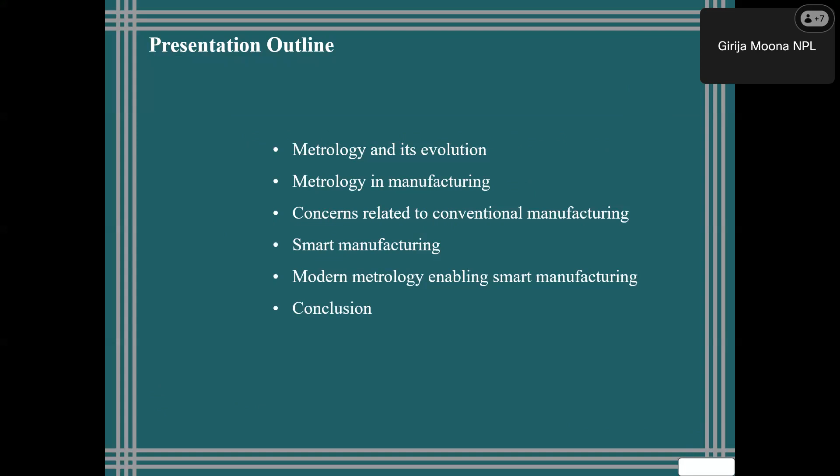So the presentation outline consists of metrology and its evolution, metrology in manufacturing, the concerns related to conventional manufacturing that motivate us to step to smart or digital manufacturing, a brief introduction of smart manufacturing, how metrology supports smart manufacturing, and a small conclusion after that. I love this saying: everything is perfect until we measure it.

So till the time you measure something, it looks to be perfect. You only get to know that there is something wrong when you start measuring it. It may be its weight, it may be its dimension, it may be its temperature.

So till the time we are measuring something, everything is perfect for us. So when metrology comes into the picture, we identify the faults, we identify the defects, and we try to rectify them by correct measurements. One saying supports this: if we cannot measure something, we cannot improve it. So for continuous improvement, continuous and correct measurements are very much required.

So first of all, we metrologists have to understand our importance in the quality infrastructure of the country. Then only we'll be able to speak about our subject, and we'll be able to create awareness among the general mass.

Okay, so we know that metrology is a Greek word derived from the word metrologia, and if at all we try to define it, we say that it is the science of measurement and its applications.

So what is measurement? Measurement is kind of assigning a number to the attribute of something. For an example, we say this object is very heavy. So how heavy is it? Till the time we assign a number and a unit, the statement is open - a very subjective kind of statement.

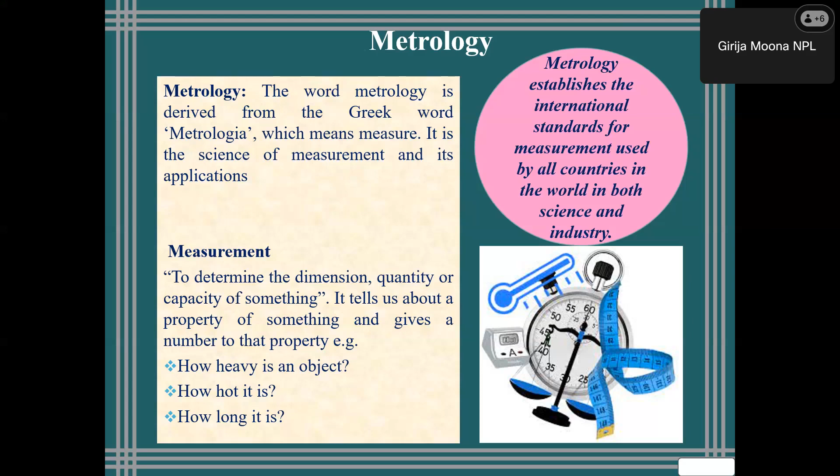So metrology plays three major roles. Technical, of course, we all are technical people, we know the technical terms of metrology. Awareness creation - we have to make people aware that metrology is very, very important.

Probably when the applications are coarse, we can be a little liberal, but when the applications are highly scientific, we cannot be liberal. We can be liberal while weighing 1 kg of vegetables, but we cannot be liberal while talking about manufacturing in the pharmaceutical industry, medicines, medical equipment, aerospace segment. There we cannot be lenient in the measurements.

And then comes the regulatory role. Probably legal metrology people know better than me what regulatory role metrology has to play. And if at all we broadly define, we have three types of metrology: scientific metrology, legal metrology, and industrial metrology.

Scientific metrology is mostly dealt with by the NMIs of the country. Like NPL is the NMI of India, that means the National Metrology Institute of India. So scientific metrology includes research and development in measurements - research done to perform precise and accurate measurements, to lower down measurement uncertainty, to reduce errors, to develop a new measurement method, and to develop a new measurement instrument. So this all includes scientific metrology.

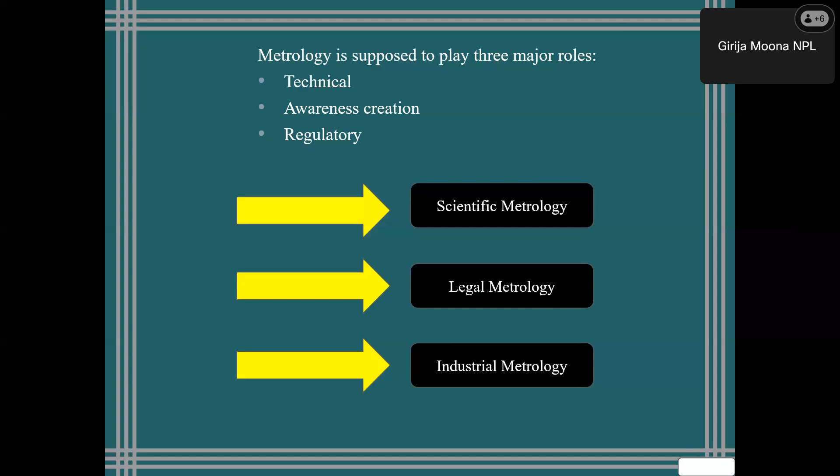Then comes legal metrology - the enforcement of metrology across the country done by you prestigious people comes under legal metrology. Then comes industrial metrology, about which we will be talking. Whatever metrology is utilized in industry for designing, manufacturing, inspection, quality assurance, scrap, rework, rejection, sale approvals - whatever kind of metrology is performed in industries is known as industrial metrology.

So the quality infrastructure of our country includes four prestigious organizations. This is not in any order - there is no hierarchy, it's just arranged in such a way that they all fit in the same slide. Okay, so the National Metrology Institute of India is CSIR National Physical Laboratory. We work for the maintenance and operation of primary standards for realization of SI units.

Okay, then comes BIS, Bureau of Indian Standards. Those people work on the documentation of standards.

We work on the physical and practical realization and maintenance of the standards for SI units, and BIS works for documentation of various kinds of standards, also known as IS something something. Then comes legal metrology, which works for the reinforcement of metrology down the line across the country. Then comes NABL, National Accreditation Board for Laboratories. So these four organizations hand in hand work to strengthen the quality infrastructure of India.

We four altogether make the quality infrastructure of India. We four are responsible for the growth of metrology across the country, for manufacturing of quality products, and for cross border trade without any kind of rejections. So we four work in close collaboration for the socio-economic growth of our country.

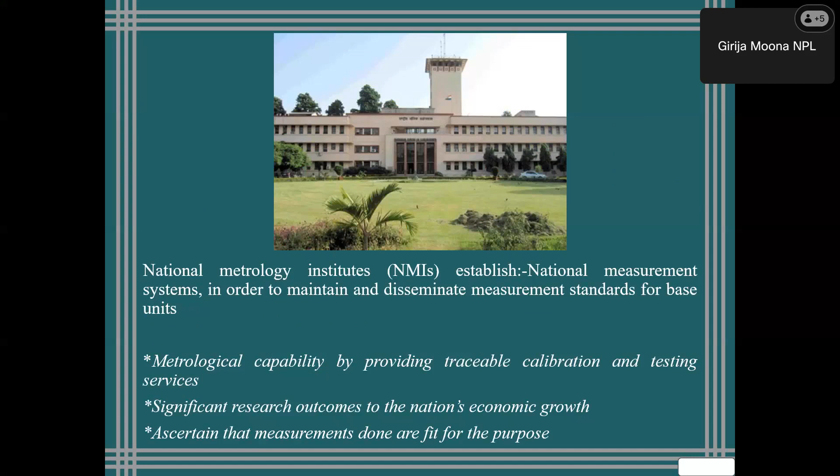The National Metrology Institute, known as NPL, maintains its metrological capabilities by providing calibration services, research outcomes, and ensures that measurements cater to the requirement of the customer. Various organizations are catered by NPL, starting from automobile giants, manufacturing giants, pharmaceutical industries, government research and development laboratories, and as I told you, SAARC NMIs. So we provide traceable calibration services to a vast variety of users.

If we talk about the basic terms of metrology, the first term that comes into the picture is accuracy and precision. I hope all of you would be clear on this. If we have some doubt, let us focus on the first left side diagram. There are 4 dots, and these dots are the measurement values, with the central red dot being the true value of the measurement.

For example, we make repeated measurements for a block of 10 millimeter nominal length, so the true value has to be 10 millimeter. But if we make repeated measurements, it will never come exactly 10 millimeter - either 10.0001, depending on the resolution of the instrument, or 9.9999 something. So for 4 sets of measurement, in the first diagram we see all 4 black dots very close to the red central dot, meaning the measurements are close to the true value and close to each other - that means accurate and precise. The second diagram shows all 4 black dots close to each other, but away from the central red dot, meaning the measurement set is precise but not accurate.

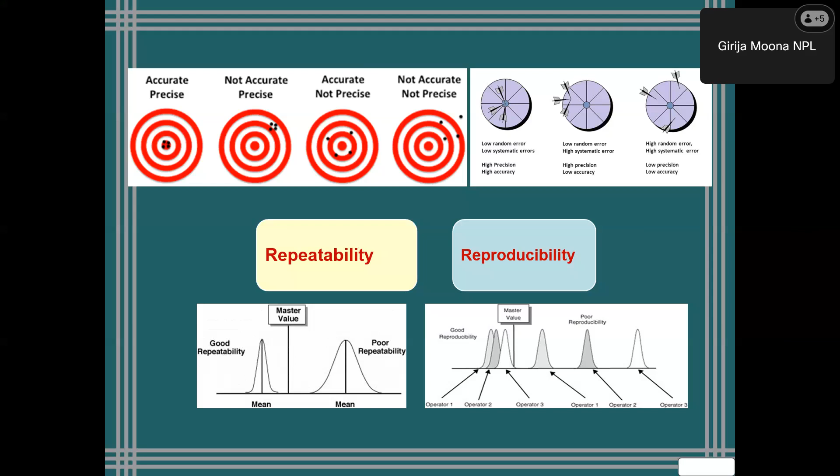Then comes traceability, the most important phenomenon of metrology, which is to be understood very thoroughly by all of us. Traceability is the unbroken chain of comparison to the SI units. Often we neglect this, but this is one phenomenon which gives authority to your measurements. Till the time the measurements are not traceable, the measurements are not reliable.

Till the time the measurements are not traceable, there is no authority associated with them. So unbroken chain of comparison to the SI unit means your measurement should eventually be linked to the SI units. It's not necessary that each instrument or measurement be directly traceable to the SI unit, but there may be a long chain, and eventually the traceability should go to the SI unit. Why? Just to give a sense of reliability to the measurements being performed.

If there is no existence of traceability, people will do whatever they want. There will be no verification of the measurements. For an example, as I told you, we have recently installed a setup for line scale calibration using laser interferometry in RRSL Bangalore.

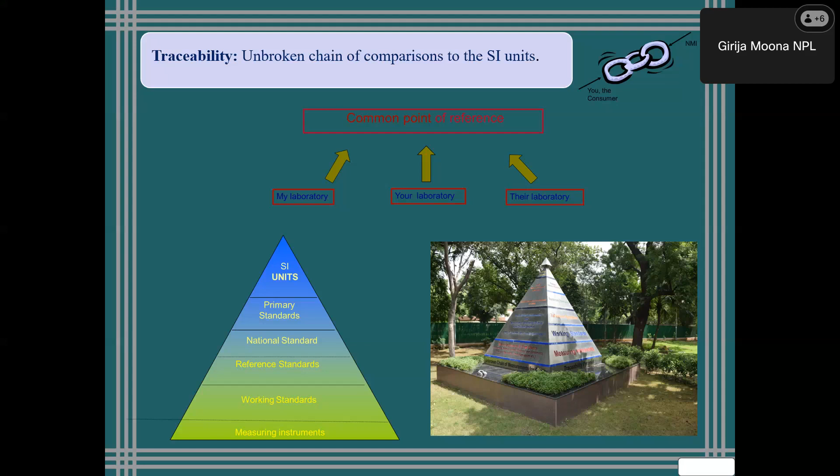There is a logic behind making it a pyramid. Why? Because as we come down the line, the errors and uncertainties keep on increasing. Why do they keep increasing? Because every time you perform calibration, the standard against which the calibration is being performed will always contribute to the uncertainty of the device under calibration. That is why it increases down the line.

Now, what is calibration? Calibration is comparison of a device under calibration with a standard under specified conditions. Comparison is not calibration; calibration needs to be performed within specified conditions. So for calibration, why do we have to train people? We have to make them realize that calibration is not simple measurement. Calibration is something to be done very seriously.

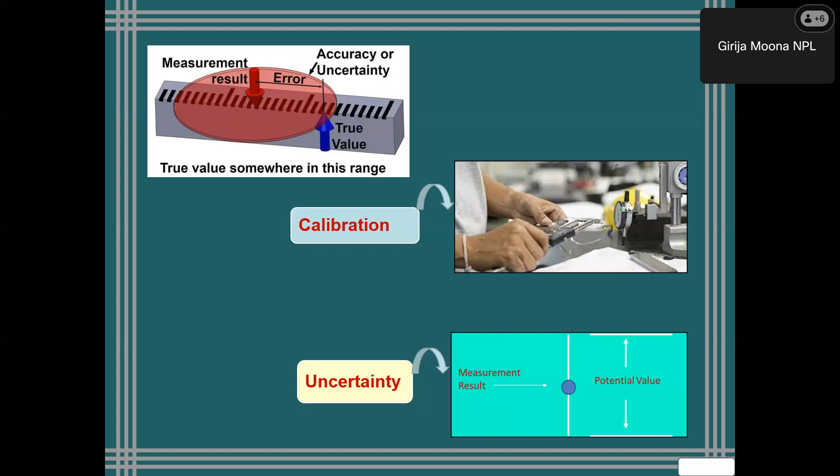Then comes uncertainty, measurement uncertainty. All of us know that measurement uncertainty is a band, the different kinds of doubts associated with the measurement observation, and those doubts may be caused by various factors. So whenever we calculate measurement uncertainty, first we identify the error sources, then calculate their contributions, and then specify the associated uncertainty with that particular measurement.

So how did metrology evolve, why was it needed? It existed even in old civilizations, so people used metrology there too. How did they use it? As we know, in old times the king was everything, so the king's organs were used as standards to measure something. So in the old scenario also people relied on measurement, but as I told you, it was not uniform because we were not technically advanced.

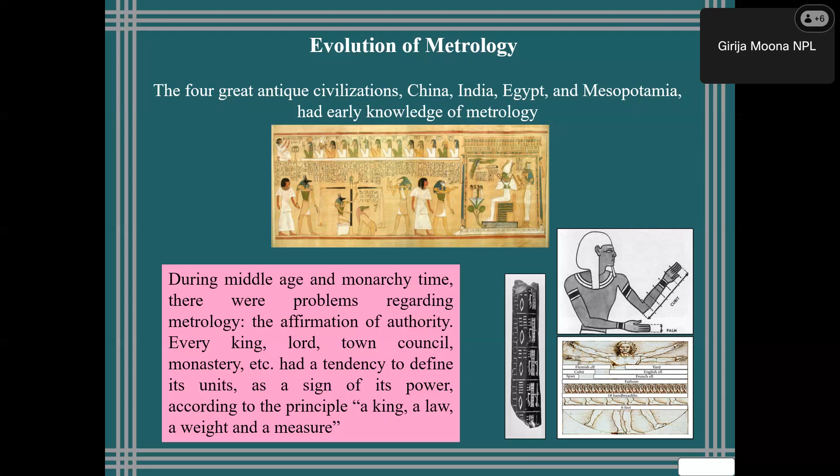There was no science, there were no instruments. So the easiest way was, as the king was the most powerful person in the particular empire, the king's hand and king's foot came from there. So the king's foot and king's hand were taken as the standard.

But this was fine as long as accuracy and precision were not an issue. For example, a king in African countries, those people are usually giant, while another king in Bhutan has a smaller arm and smaller foot. So till the time trade was not cross-border, accuracy and precision were not required. It was managing the things.

But as we kept growing, the measurement requirements kept growing. When we started making advanced weapons and machines with interchangeable parts, and performed scientific investigations, we needed universal standards. Cross-border trade can only exist when there is uniformity of measurement. That is why we talk about mutual recognition agreement or arrangement, meaning measurements performed in a country would be acceptable in another country. So as we grew scientifically, we wanted to make precise measurements.

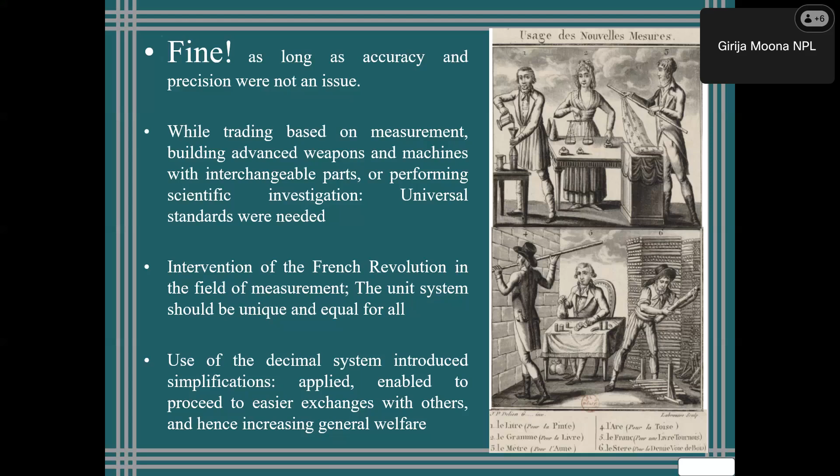And when it came to the French Revolution, the unit system came into the picture, the decimal system came into the picture, and things took a faster pace. The SI units and precision in measurements started taking place from the 17th century and kept growing till the 21st century. The first year was 1670, when a unit was proposed for length measurement in terms of the terrestrial meridian. And then till 2018, metrology kept evolving.

In 2018, new definitions for four units, kilogram, Kelvin, mole, and ampere, came into the picture. You all must have heard of the redefinition of mass, redefinition of temperature, redefinition of mole, and redefinition of ampere.

Earlier, why did we need this new definition? Earlier, we used to measure or realize the SI units using physical artifacts, like prototype copy number 57, the meter bar, or thermometers. But what happens is all these physical artifacts involve a lot of errors. They keep degrading as time passes. There are accumulations, contaminations. So the metrologists proposed that we realize all the SI units in terms of the fundamental constants of physics. So kilogram was to be realized in terms of the Planck constant.

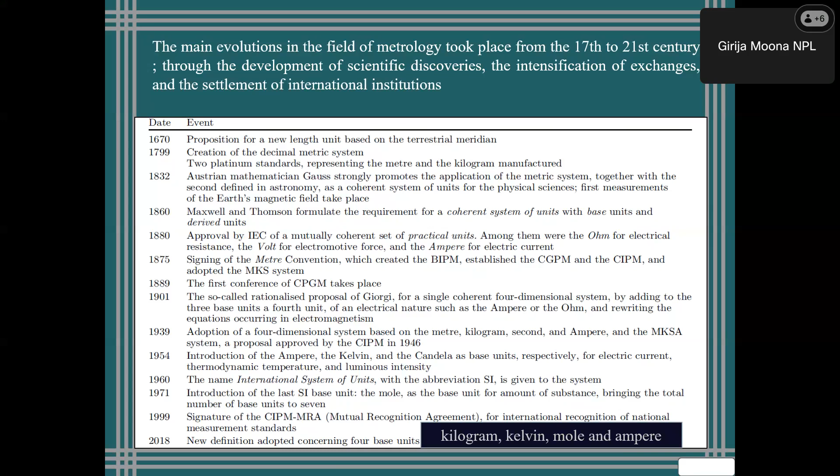Kelvin was to be realized in terms of the Boltzmann constant. Mole was to be realized in terms of Avogadro's number. All these physical constants do not have any scope of error or uncertainty, so it is always better to realize SI units in terms of these physical constants. So in 2018, it was a revolutionary year when the redefinition of four major SI units came into the picture.

On an international front, this is done by the General Conference on Weights and Measures, known as CGPM. It is the supreme authority of the International Bureau of Weights and Measures, BIPM, situated in France. BIPM is the apex body when we talk about metrology. It is an intergovernmental organization with 59 member states who act together. There are four areas: chemistry, ionizing radiation, physical metrology, and coordinated universal time, on which BIPM works. Sometimes BIPM also provides traceability to various NMIs.

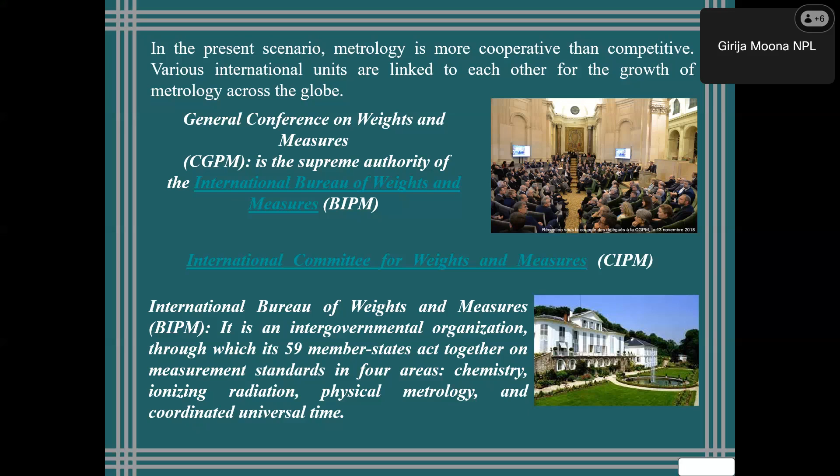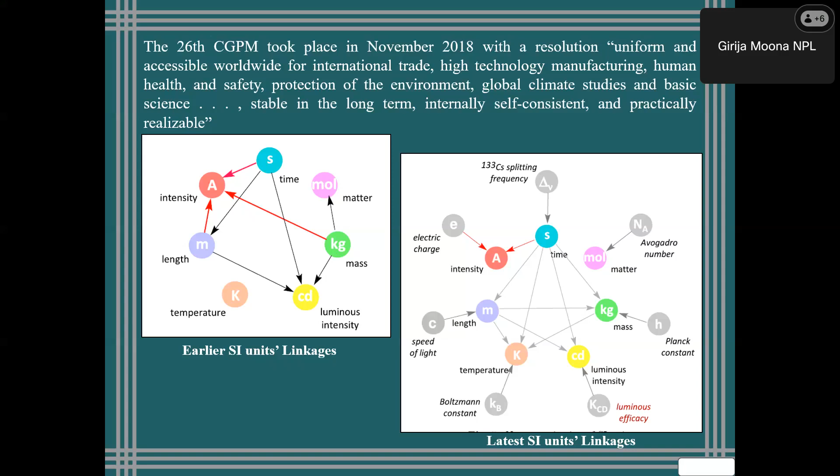Now comes the need of metrology in manufacturing. Why do we need metrology in manufacturing? When we manufacture something, we need to accurately define the shape and size. If the shape and size of the component being manufactured is not defined clearly, there would be issues while we assemble certain parts. Also, we need to ensure confidence in whatever we are manufacturing.

For example, a designer has a design in mind and decides some dimensions, then passes the drawing to the person who has to manufacture it. Until the person manufacturing the component understands the drawing correctly, they won't be able to make it correct. So there should be a very thorough understanding of the design provided by the designer. That builds up the confidence.

Metrology establishes a strong link between the designer's intent and the product which is manufactured. Does it function as it was supposed to function, or is it malfunctioning? The designer thought, I will design this product and it should function this way. The manufacturer understood the designer's drawing correctly and manufactured the component.

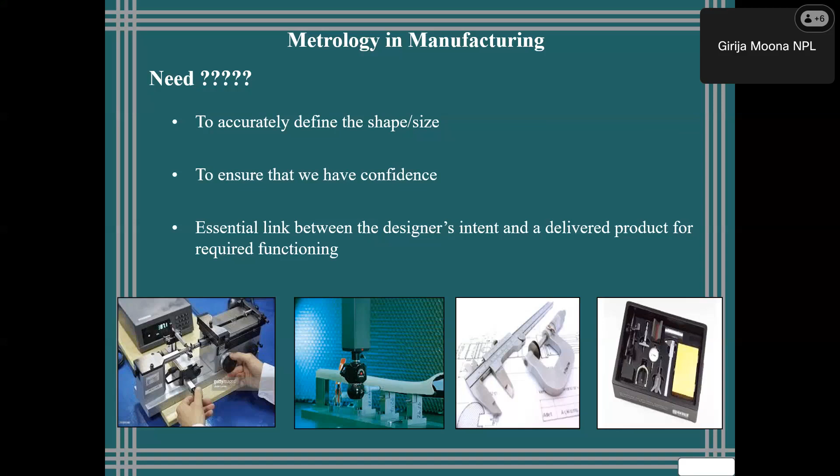So all three - the people involved in all three steps - should have a strong, thorough understanding of metrology, and realize the importance of the person giving them input in terms of metrology. The person operating the instrument or machine to manufacture the product has to understand the designer's drawing very thoroughly. The person inspecting the manufactured component has to understand both the designer's drawing and the manufacturer's thought.

So measurement is the most fundamental concept of science and technology. Also, it ensures reliability, so that if the measurements are reliable, you can also control the processes to maintain quality, and the risk of false decision making with coarser sampling and higher measurement uncertainty is reduced.

Why? Because false decision making is, for example, when a component which was to be rejected has been selected in the lot, and the component which was to be selected has been rejected by mistake. This only happens when people are not thorough in metrology. They have to be very thorough in metrology, and if they understand it correctly, there will be fewer false decisions.

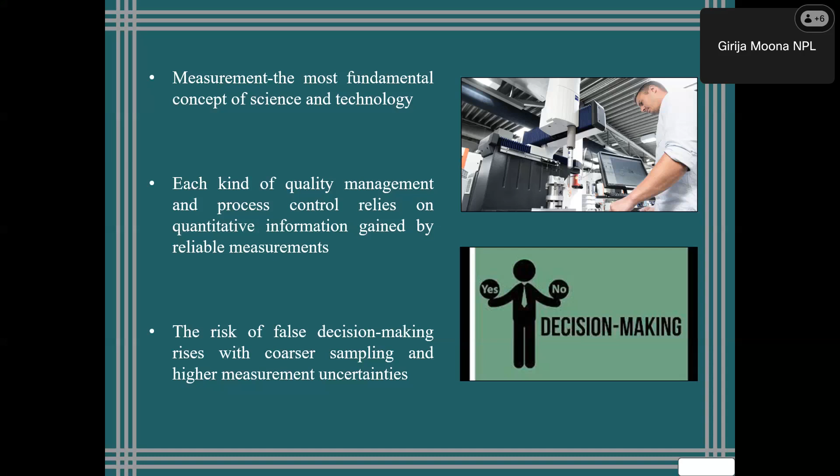Now comes a term, interchangeability. This is a very interesting term, and I am very much attached to it because it is directly associated with the dimensional metrology fundamentals. I am a dimensional metrologist by profession for the last 15 years. I'm so much into dimensional metrology that anything related to it automatically becomes my favorite. So interchangeability is a term associated with dimensional metrology.

How do we define interchangeability? It is associated with products - any part chosen at random should fit properly with another mating part, which is also randomly chosen. For example, 5 of us are sitting on a table, 5 people in a line, with a table in front of them, and 5 Bisleri distillery water bottles have been placed on the table.

For example, a person drinks all the water and puts the cap back on the bottle, and another person by mistake drops the cap of their bottle. So you can always borrow the cap of another bottle and fit it on your bottle. That means all the caps of Bisleri water bottles are interchangeable. All the bottles are interchangeable. Any cap can fit into any bottle, and any bottle can be tightened with any of the caps. This is known as interchangeability.

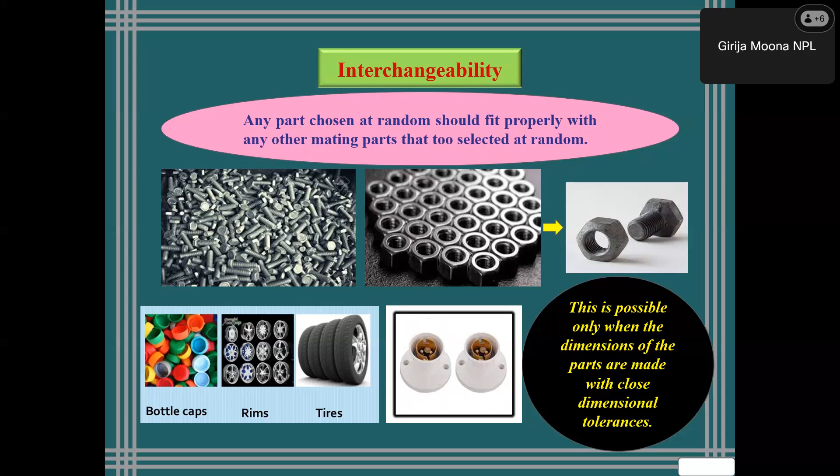When we take the dimensional tolerances very precisely and handle them very accurately, then only the interchangeability can be brought into existence. Else, one Bisleri bottle cap will be specific to one Bisleri bottle only, they cannot be interchanged. So, interchangeability is possible only when the components are manufactured with very close dimensional tolerances. So, how do measurements play a very important role in manufacturing?

They ensure quality, reduce waste. When the quality is maintained, there will be less wastage. And when wastage is less, the productivity will be higher. The productivity is higher, the profits will be good, and wherever you make a quality product, it increases customer satisfaction. Quality is directly related with customer satisfaction.

Can you imagine? Measurements are directly related with customer satisfaction. Even the mobile phone you are holding in your hand has been designed by keeping into consideration the size of your palm, how comfortably you can hold it. Mobile phones which are tough to hold are not existing anymore in the market. So that is also an aspect of measurement - the palm size and the mobile phone should be compatible to each other, there shouldn't be any discomfort while holding it. Even the mobile phone's screen roughness has to be taken care of, so that it doesn't get affected by small impacts.

Also, inside the integrated circuits, whatever is there, that all comes into nanometrology. The contact points' dimensions are also important. ICs have different contact points, and the dimensions of the contact points are also different. The dimension of the contact points is also very important, so that the circuit works in a correct way. So the measurements are directly related with customer satisfaction.

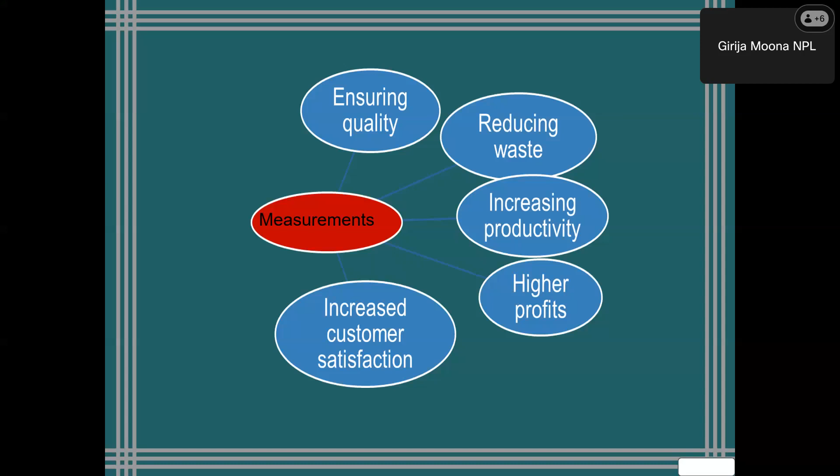It is only a matter of being aware about the beauty of metrology and measurements. So, as I told you, metrology is an indispensable part of modern manufacturing infrastructure. As products become complex, they need high quality control, and high quality control is directly related with elimination of errors and improving the processes, which can only be possible with precise and traceable measurements.

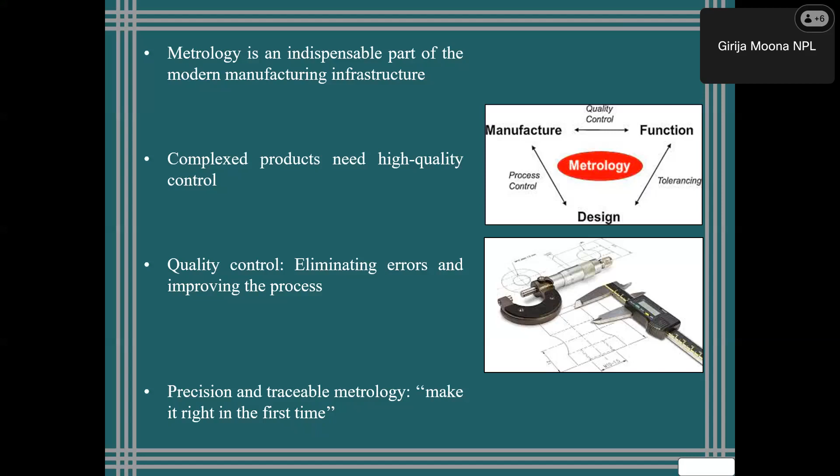So, metrology keeps one principle in mind: make it right the first time. There is no scope of rework, there is no scope of wastage. The product should be right the first time.

The life cycle of a product is supported by accurate and precise measurements. As I told you, certain products fail during service because the measurements were not taken care of properly. In-service failure of a component is very dangerous - can you imagine an aircraft flying in the sky and some component fails there? It would be catastrophic, costing many people's lives. So, if during manufacturing we somehow ignore the aspects of metrology, the consequences can be dire.

So, standardization of parts, processes, and parameters when we talk about manufacturing and metrology is very important. As I told you, it is very less likely that a single manufacturer is making all the components and getting them assembled these days. A survey says that 75% of the components used by any industry are produced by other industries. So they bring those components, get them assembled, and make a product. If those components are not treated correctly from the aspects of metrology, the assembly would be a big fail. So all the small manufacturers also have to be careful.

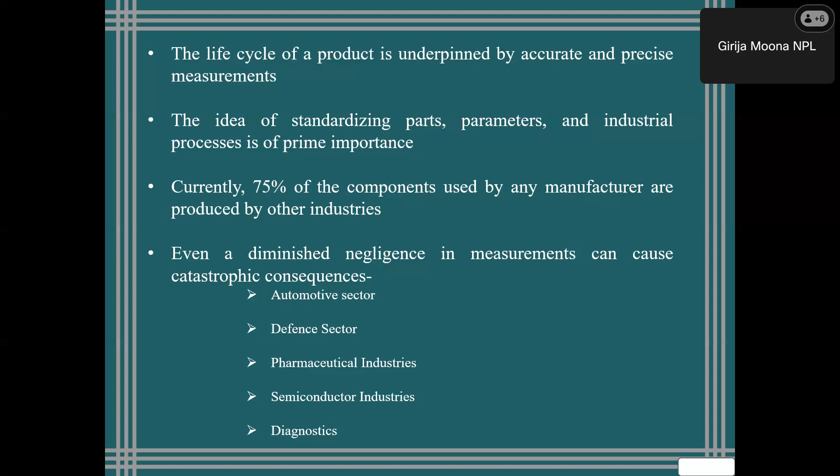Unfortunately, there is no coherence between laboratory metrology and industrial measurements. The metrology observed in laboratories, with skillful operators, the best environmental conditions, and the best instruments we could procure, is very different from industrial measurements. So if we are providing traceability to industrial measurements, there has to be some coherence. There is a huge gap between state-of-art facilities and industrial requirements. It has to be in coherence, the laboratory metrology and the industrial metrology.

First, in terms of knowledge. Second, in terms of infrastructure. Industries have a thought that if they invest more in metrology, there will not be much higher profits. But what happens if we strengthen our infrastructure? There may be a temporary drop in productivity initially, but in the long term there will be significant productivity gains. So industry people are also to be counseled this way, that if they invest in metrology, it is going to give them higher gains in the long term.

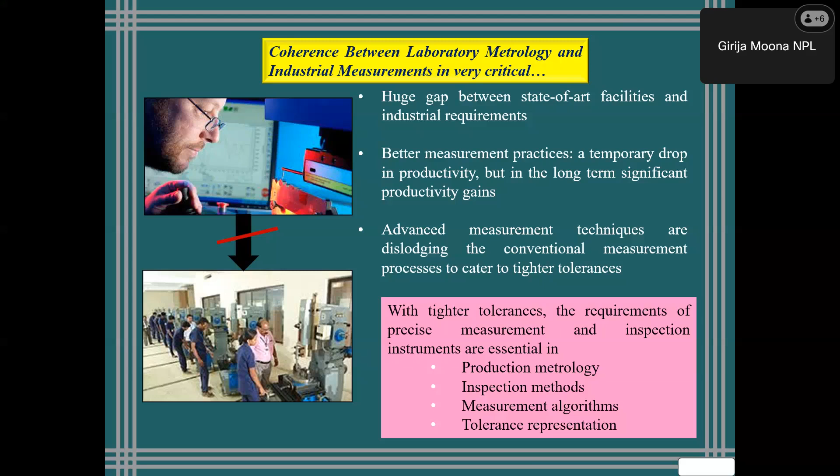And also, advanced metrology techniques are always better than conventional measurement processes, especially when we talk about tighter tolerances. So if we want to handle tighter tolerances, we need precise instruments, and those are essential these days—for smart manufacturing, production metrology, inspection methods, measurement algorithms, and tolerance representations.

Inspection—manufacturing eventually relies on inspection. So inspection is nothing but metrology; it is an integral function of production. What happens in inspection? They examine a part to see whether it conforms to the design specification or not. As I told you, the designer, the manufacturer, and the inspector all have to be in coherence.

In mass production, industrial inspections become most important because they involve the interchangeability of parts. If inspections are not done properly, the interchangeability would be disturbed. To achieve interchangeability, the dimensions of components should be well within the limit given by the designer. Inspection can be done in two ways—either you do actual measurements or you do gauging. Gauging is faster; actual measurement takes time.

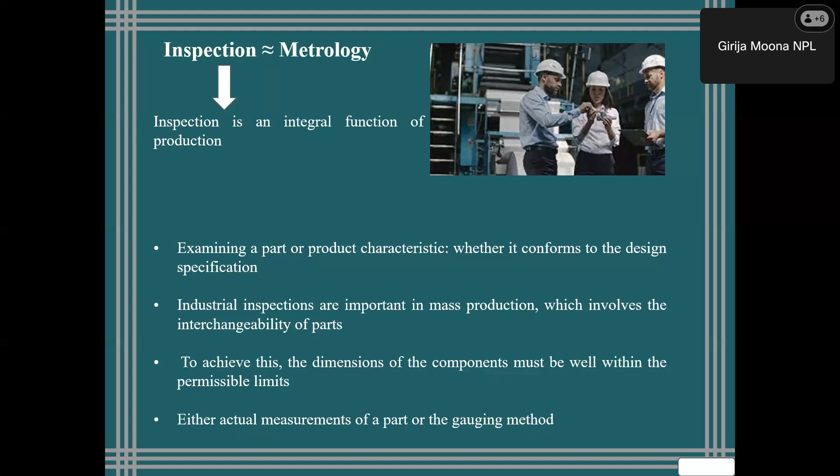So most of the times the inspection involves gauging methods. You use ring gauges, length bars, gauge blocks, and other go-no-go gauges, plug gauges, thread gauges to inspect the various components which are being manufactured.

As I told you, today's quality is tomorrow's reputation. Market reputation is completely dependent upon the quality. So the inspection influences the quality in a very significant way. It ascertains that the part conforms to the standard, interchangeability is there, customer goodwill is there. If at all there are some inadequacies in manufacturing, those are to be identified and eliminated. Acceptable parts are to be taken care of, and there should be a reduction in scrap.

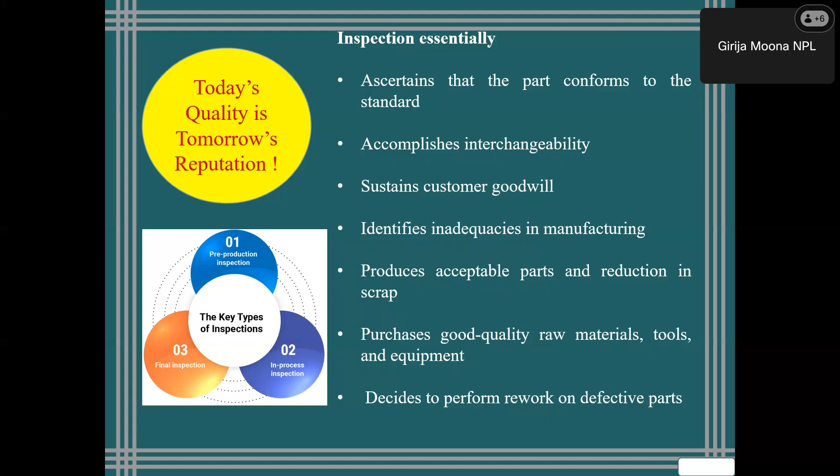That means design in a correct way, manufacture in a correct way, inspect in a correct way, give quality products. Scrap those which are not as per the quality, rework on them, and again produce quality products. Good quality raw material and equipment are to be purchased. And if at all, after taking this much care, there are some defective parts, they are to be reworked. So there are certain challenges and trends in the manufacturing industry.

The trends are like, we need to increase the integration, reduce the measuring time, there should be automatic data processing. If at all we talk about metrology, errors should be less, uncertainty should be less, measurement uncertainties are to be verified. Measuring techniques are supposed to be advanced.

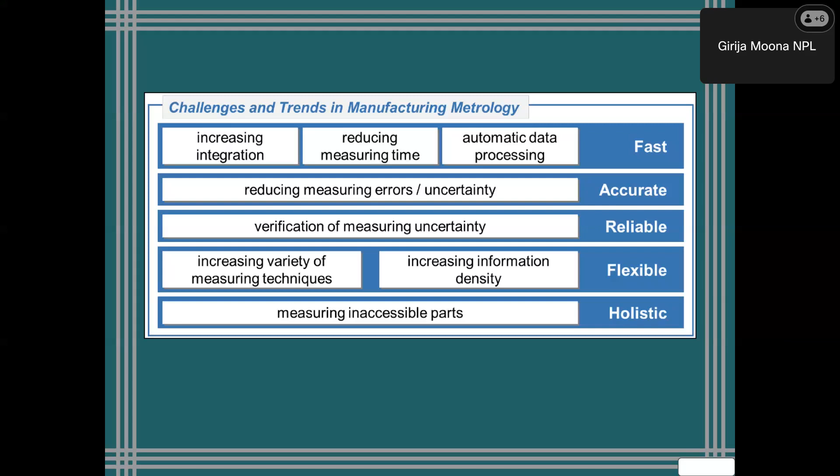And then inaccessible parts - if a component is very complicated, you cannot measure everything using a scale or a vernier caliper or a micrometer. You ought to have an articulated coordinate arm measuring machine or a rocker arm measuring machine or a portable CMM to measure the inaccessible part, and that is an advanced measuring instrument. So metrology, and then communication, and then planning.

Metrology in manufacturing plays a very important part. We can even optimize and control the processes which are being used in manufacturing. It is not an isolated field. Manufacturing and measurement are supposed to be as close as they can in order to limit the time wastage.

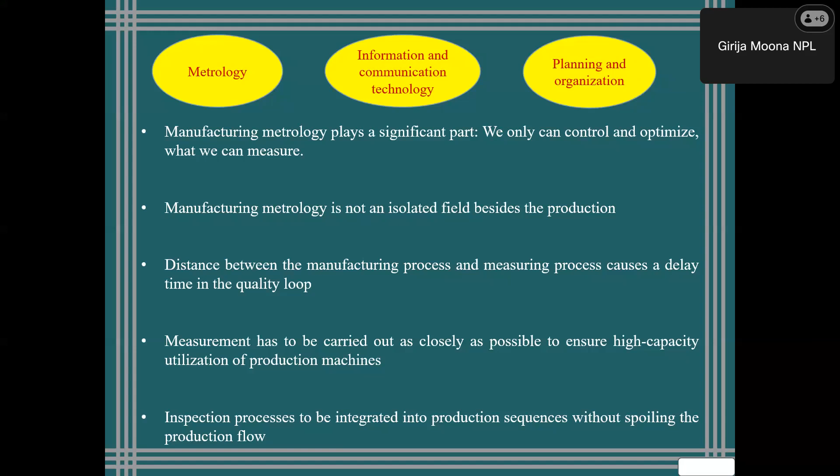What are the concerns related to conventional manufacturing? Those forced us to target smart manufacturing. The concerns are: flexibility of design is less, customization, production time is longer, passing the information is very slow, optimization of services is limited, there is no communication and analysis of performance, real-time data extraction is not there, because of which false decision making happens, digitalization is less, integration is less, and getting data is a tough task.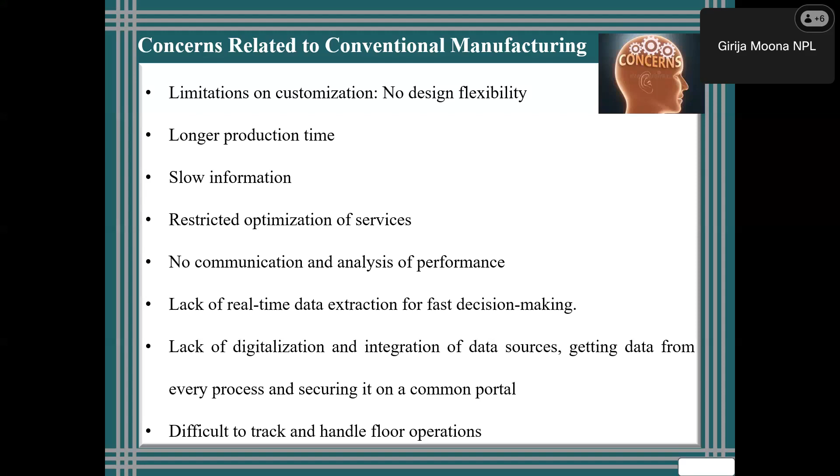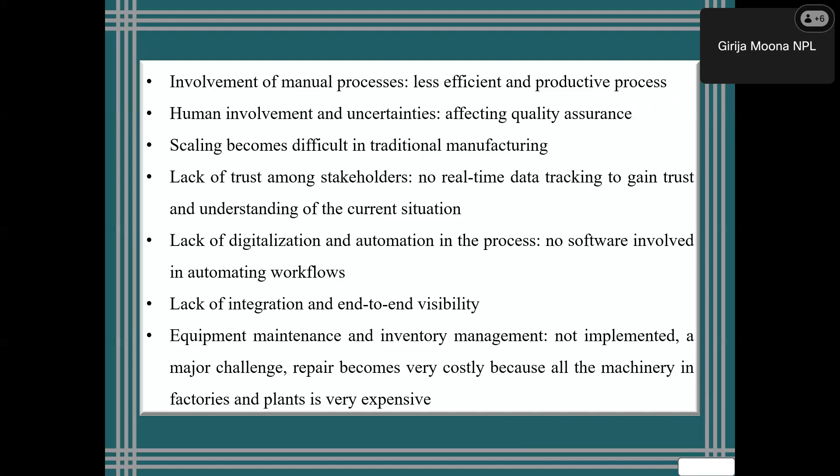Floor operations are tracked and handled in a very difficult way. Conventional manufacturing involves a lot of manual processes, because of which they become less efficient and less productive. Human involvement causes errors and uncertainties and eventually affects quality assurance. Scaling becomes very difficult in traditional manufacturing. And if the product loses its quality, lack of trust develops in the stakeholders. Automation is less, integration is less, equipment maintenance and inventory management becomes tough and at times unmanageable.

So there is a quick comparison between traditional manufacturing and smart manufacturing. Traditional manufacturing involves manual processes, smart manufacturing is digitalized. Traditional manufacturing is time consuming, data is scattered, operations are isolated, whereas smart manufacturing is faster, with integrated operations. Traditional manufacturing has frequent machine failures, whereas in smart manufacturing, machine failures are less because there is real time data tracking. The moment the machine fails, you get an indication that this part of the machine is not working, production has been stopped. You go and rectify that and start manufacturing again.

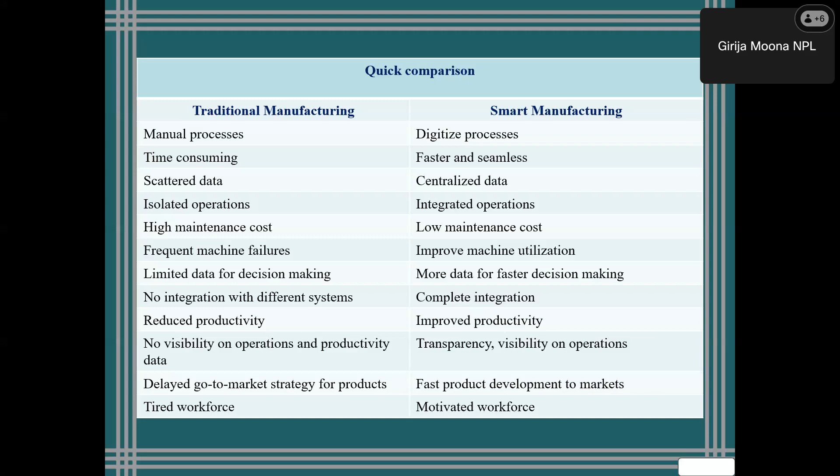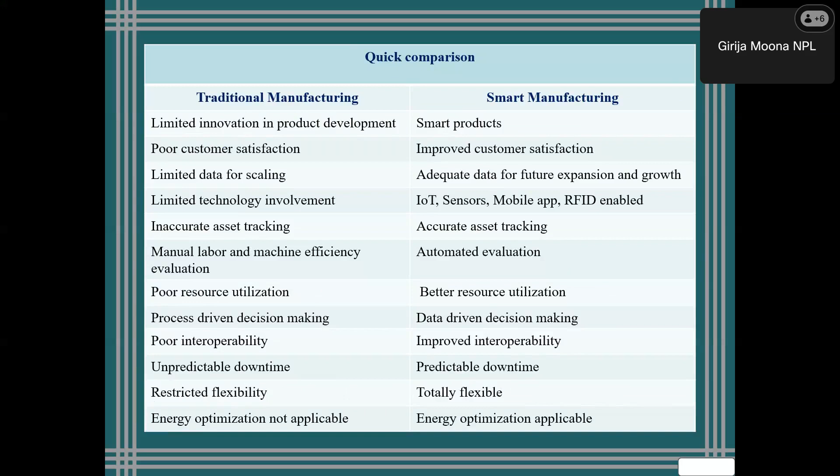Reduced productivity may be there in traditional manufacturing; in smart manufacturing, productivity is better. Poor customer satisfaction in traditional manufacturing; smart manufacturing has higher customer satisfaction, since there is scope for flexibility and customization of whatever products we are making. Poor resource utilization in traditional manufacturing, better resource utilization in smart manufacturing. In traditional manufacturing there is unpredictable downtime, whereas in smart manufacturing the downtime is predictable, again because there is real time data accessing.

So smart manufacturing consists of these components: cloud computing, big data, system integration, Internet of Things, digital manufacturing, additive manufacturing, robotics, sustainable manufacturing, and augmented reality. It employs computer integrated manufacturing, which provides rapid change in designs and digital information technology. Smart manufacturing involves smart factories, which consist of systems having the provisions of modeling and simulation, and strong cybersecurity - if at all you use a lot of data, that data has to be secured also.

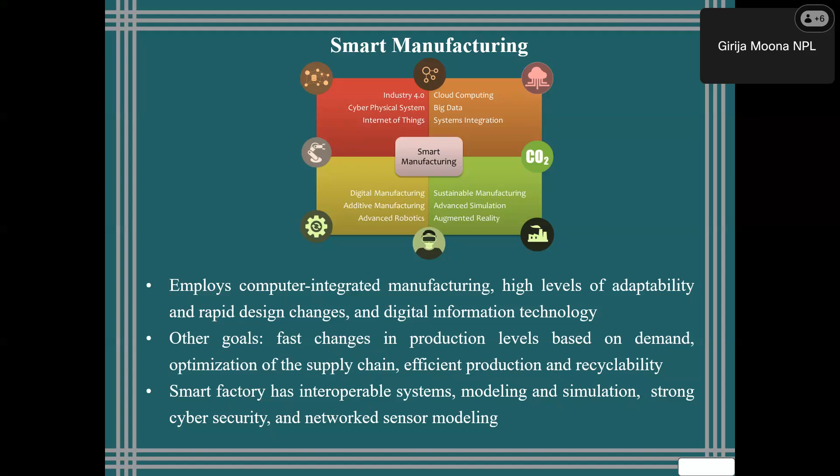You cannot leave that data like that, somebody else can access that and control the things. So that has to be governed with strong cybersecurity and network sensor modeling also.

Real-time data collection and processing and making decisions depend upon that data collection is a very important component of smart manufacturing. So it makes the industry more efficient, profitable, and sustainable. And also, it fulfills the customer need.

So if we want to define smart factory, we would say that it is a digitized manufacturing facility that uses devices, machineries, and production systems to collect and share data continuously. So the whole game is collection of real-time data, analyzing that, taking decision, improving the process, and making the quality product. In short, smart manufacturing or smart factory is a game of using advanced devices, advanced sensors, real-time data collection, analyzing data, taking decision on the data, and improving the processes.

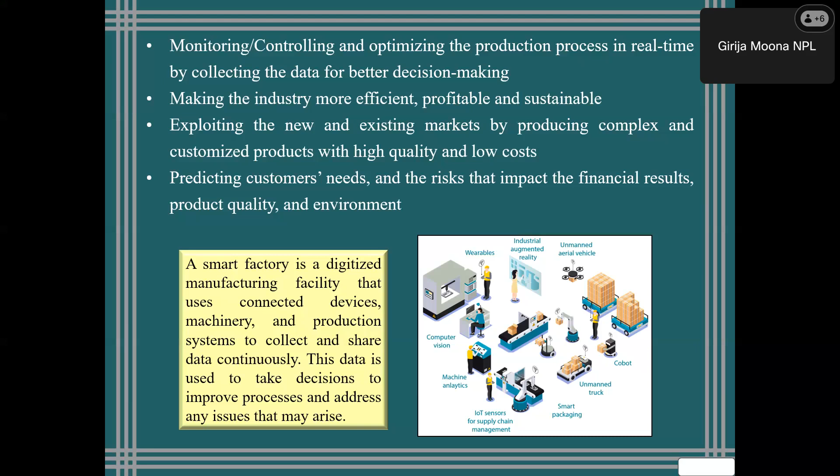So main benefits are the efficiency is increased. How the efficiency is increased? The downtime is less. Why the downtime is less? Because immediately you get an indication that the machine has been broken down. So the downtime is less. You rectify that machine, get that repaired. It increases your productivity and saves the energy.

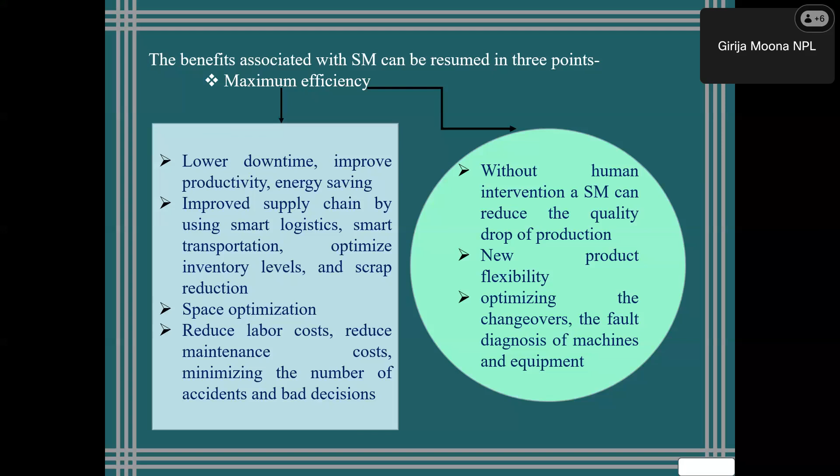Transportation is smart. You can always optimize the inventory levels and reduce the scrap. Space is optimized, labor cost is reduced, there are no human interventions, so the drop in quality is less, and the product can be customized as per the requirement of the customer.

Then comes the proactivity of the system, proactivity of the operators. The turbulent and unpredictable business environments cause critical situations and huge financial impacts. If at all you are able to predict the market trends, you are able to predict the customers' preferences, you can work proactively in a better way.

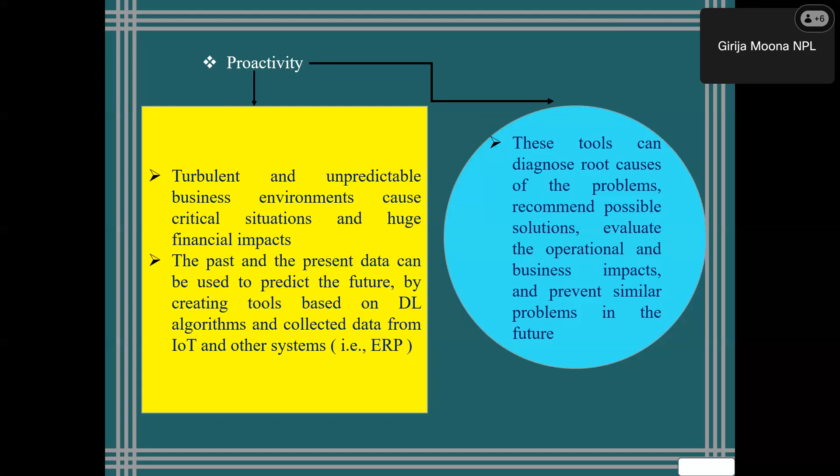So for that also, you need to have a lot of data, and that too a secured data. So these tools which are used in smart manufacturing diagnose root causes of the problem, recommend possible solutions, and encourage the product proactivity. Now comes the smart decision making.

There are various digital algorithms, deep learning, machine learning things are used in smart manufacturing. So it becomes self decision making and self executing, without any human involvement. The capacities of the machine exceed humans, and they can take smart decisions. And when they take real time data, they predict the data, they use the algorithms, they can make better decisions.

There are various components of smart manufacturing. How do we decide that this kind of manufacturing would be called smart manufacturing? So there are various components. Like one of the components is industrial internet of things. It focuses on the industrial use of internet of things, connects the physical systems over the internet.

It includes sensors, actuators, their monitoring, process control, and how the data would be stored in the cloud, allowing how the communication would take place, and they aid in the production planning and scheduling. Even in the maintenance part, they identify the faults and take the decision and improve the human machine engagements. This also enables the customers to see the visual display of the products and procedures for advertisement purpose. So internet of things is one of the most important components of smart manufacturing.

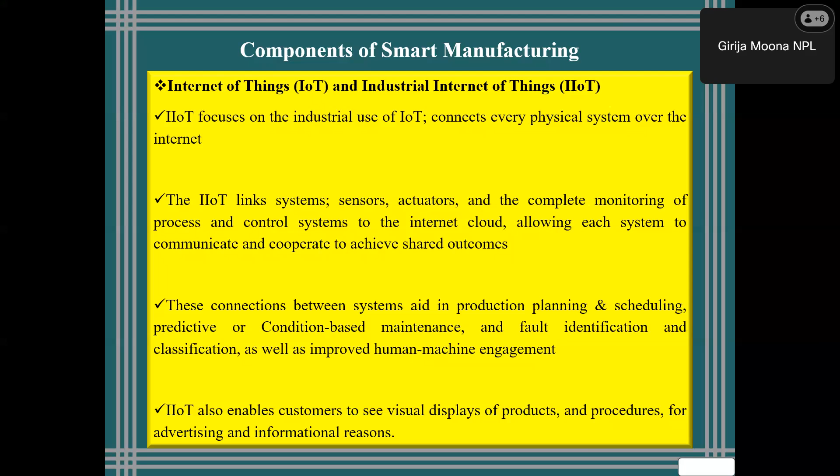Then comes big data analysis. As I told you, there is a lot of data in smart manufacturing. Real time data is being taken, being analyzed. So for decision making, there should be good provisions to analyze this huge volume of data. So big data analysis helps the manufacturer to identify the present state and reason for the failure

of the product, why the product failed amongst the customers, and how it can have a good reputation amongst the customers. So they can even analyze the shopping behaviors and interest of the customers. This is also a part of the data analysis in smart manufacturing.

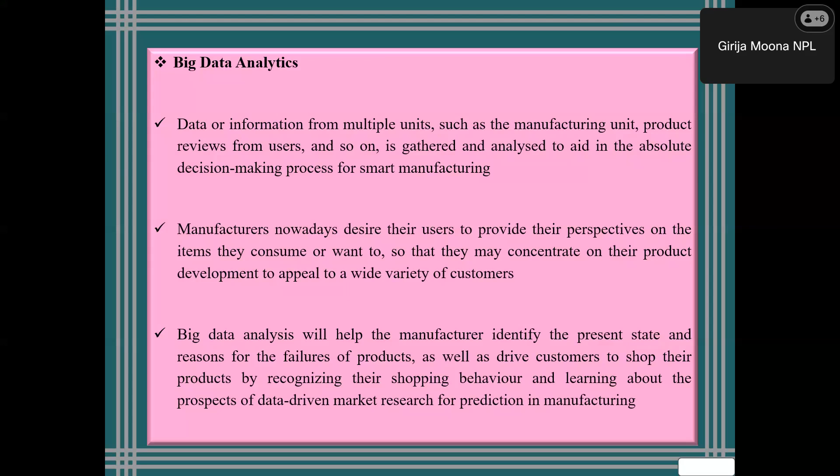Artificial intelligence. Each one of us knows how artificial intelligence is enveloping everything around. So it is being used in the modern era, like by increasing human robot engagements and minimizing the involvement of humans in hazardous areas, like wherever we deal with harmful chemicals or gases, we can use artificial intelligence there.

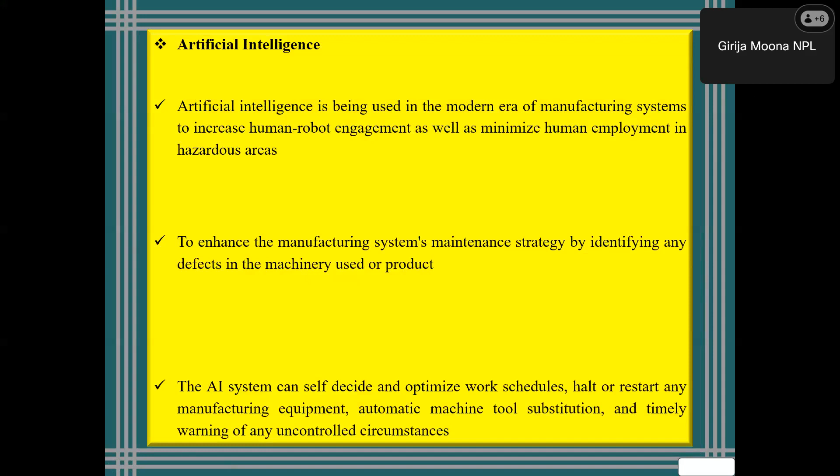The AI systems can decide and optimize the work schedules. They can stop the production at any time, they can restart it. You feed the way you want, and it will work the way it should. Then comes the cyber physical systems. As I told you, security is very, very important.

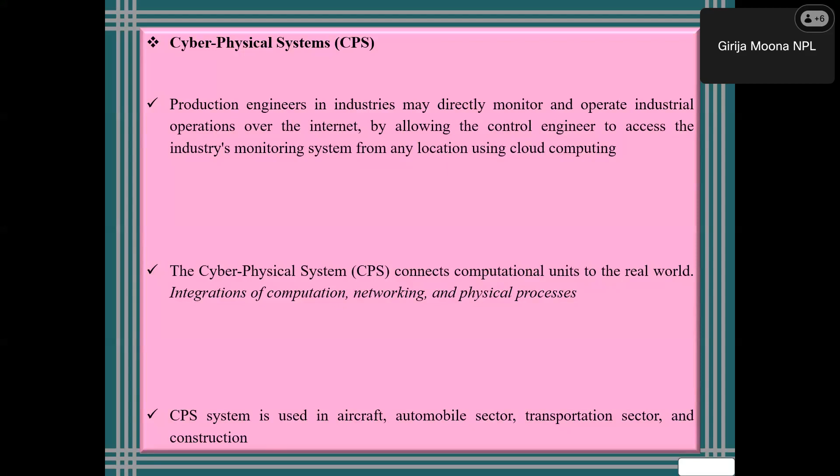It involves the integration of computation, networking, and physical processes, and it is used in the aircraft, automobile, transportation sectors, and construction also. Then the use of smart sensors.

Without smart sensors, smart manufacturing is nothing. Smart sensors are used for specific inputs and data processing, like RFID, that is also a smart sensor. Barcodes are also smart sensors. So all of them are being used in smart manufacturing.

They help in identification of the part and the process. We all know that we use a laser to scan the barcode on a product, and you get the details of the product. You don't have to go into detail or go to a specific person to know about the product.

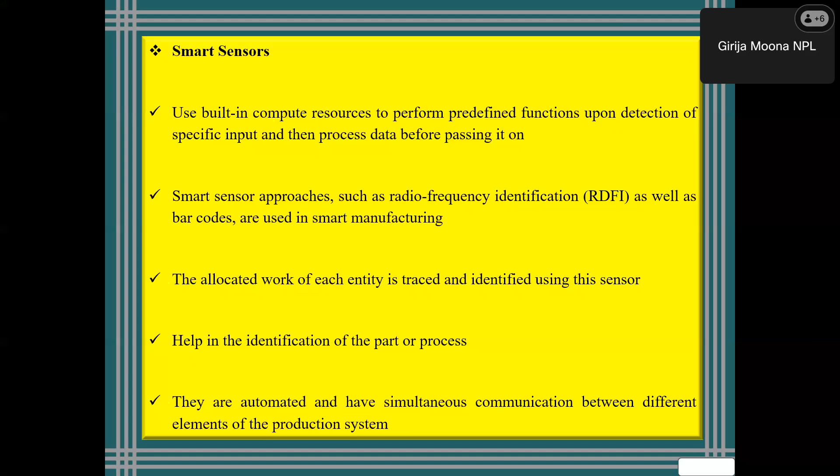So these are all contributions of smart sensors to smart manufacturing. Additive manufacturing is probably the most fast emerging trend of mechanical engineering in manufacturing. Additive manufacturing is also known as 3D printing technology.

What happens is, you have a part in mind, you make the CAD drawing, feed it into the printer, and feed the material by which you want to manufacture the component. You feed the drawing, and the printer layer by layer manufactures the part. It manufactures the part beautifully.

Additive manufacturing has other advantages also. There is less wastage while we manufacture any product using additive manufacturing. So additive manufacturing is also a key component in smart manufacturing.

The most important contribution is that it can do reverse engineering. Reverse engineering with additive manufacturing is much easier. So additive manufacturing is a very important component of smart manufacturing, and there are many provisions to play with it.

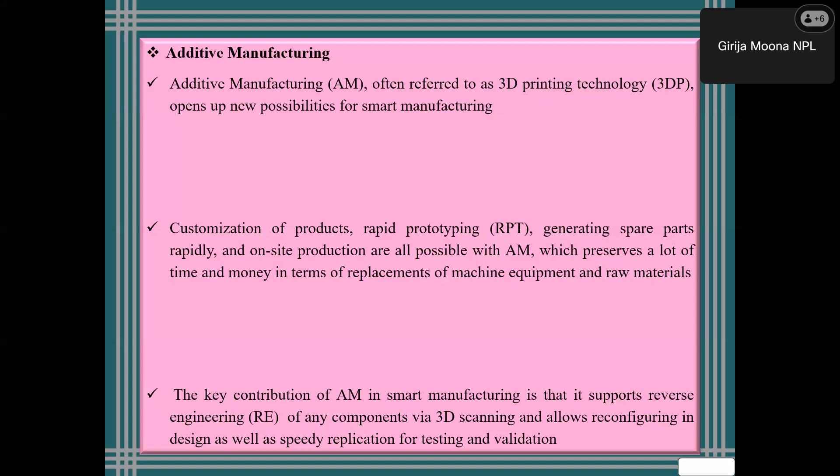Then virtual reality and simulations. Of course, we know that simulations are very important. We have to make the prototypes, simulate them, and then we can scale up the production.

And manufacturing systems are flexible. They are targeted to meet the demands, like no wastage. Whatever is the demand in the market, that can immediately be fulfilled by the industry.

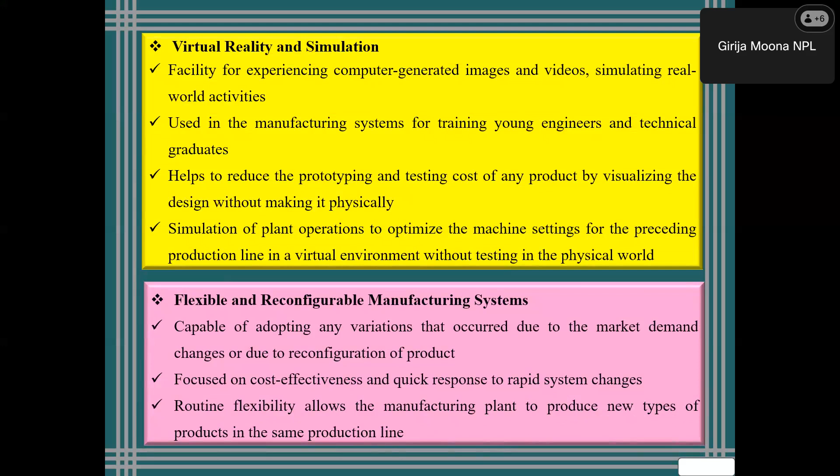So how do we implement smart manufacturing? The main goal of smart manufacturing, as I told you, the whole game is of data. We collect the data in real time and improve the factory.

Another very important concern we have in mind is that if computers or artificial intelligence or smart sensors come into the system, there will be unemployment. People will be unemployed because the system will throw the humans out. No, there will be no threat to employment. There will be no threat to the jobs of humans.

If we fully emerge into smart manufacturing, humans will not be replaced by artificial intelligence. Rather, their capabilities will be boosted to handle artificial intelligence and smart sensors. So there shouldn't be any threat to the youth that if we grow technically, there will be less employment. It will never be less, it will increase, because as we grow technically, the market will grow, the consumers will grow, and trade across borders will grow. So there will be no threat to employment.

As per a study done by McKinsey, the manufacturing sector has 60% automation capability. So smart manufacturing can also increase the production capacity significantly.

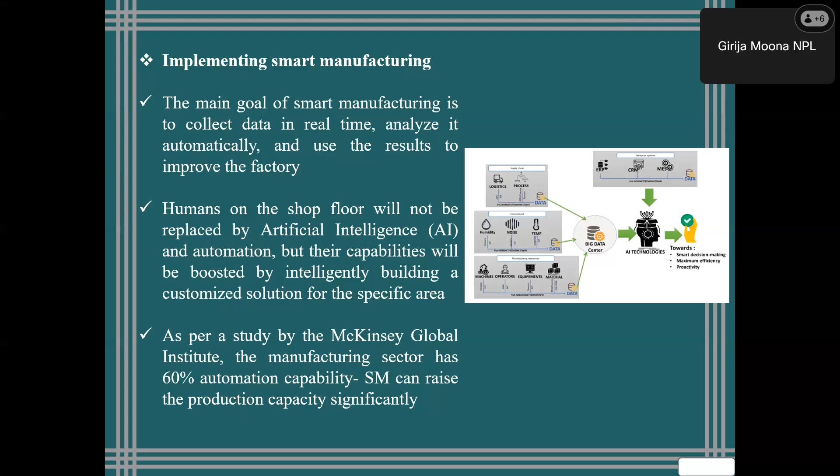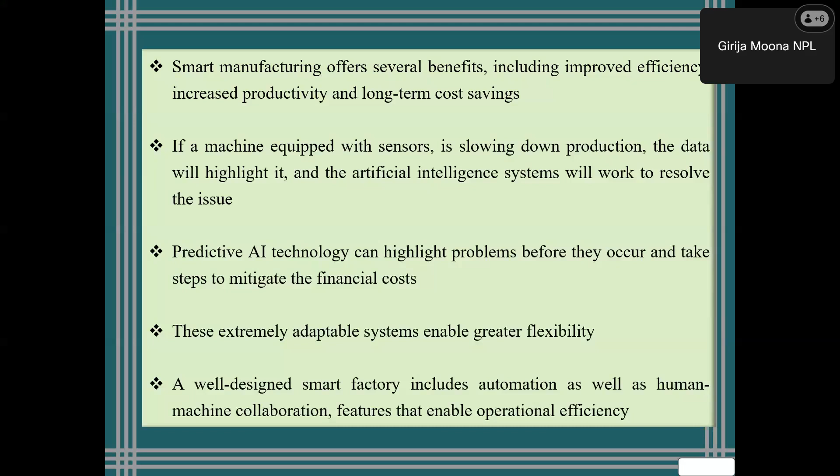It offers several benefits, including improved efficiency and cost savings. If a machine is equipped with sensors and there is a slowdown in production, it will highlight it, and the artificial intelligence will work accordingly. AI technologies can make certain adjustments to production to make manufacturing smooth. There are greater flexibilities, better human-machine collaborations, and operational efficiencies will be increased.

There are certain concerns, I would say. It involves a lot of cost. The upfront implementation on the first hand involves cost. So mid-sized companies are kind of not interested in that.

But in the long term, as I told you initially, smart manufacturing is the implementation of better measurement systems during manufacturing. So investing in measurement systems may make someone feel that it is costing too much and they shouldn't do this. But in the long term, it will always give you benefits.

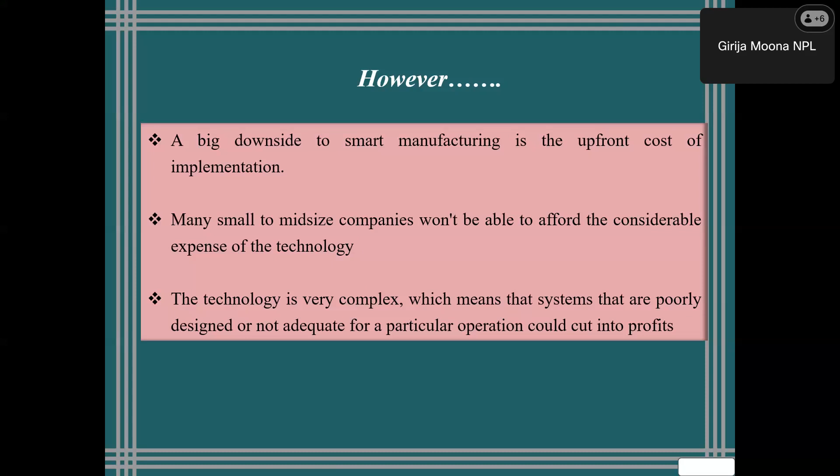Now, if we talk about industrial metrology, since smart manufacturing is all about industrial metrology, there are various modes to be implemented to make it smart manufacturing. First is offline measurement - what we usually do is make the components at the shop floor and take them to the inspection room to measure them. So there is a gap between the shop floor and inspection room, completely dependent upon the human element. That means time-taking process and involvement of human errors. Then comes inline measurement, which is automated and precise measurement in the production line itself. You manufacture the system, it will be measured.

If there is certain machining required, the machining will be done, again measured. Then again a process will be done, again measured, until it reaches its final stage. Inspection will have a very minimal role because it has been measured at every stage of manufacturing. So inline measurement is the best kind of measurement approach.

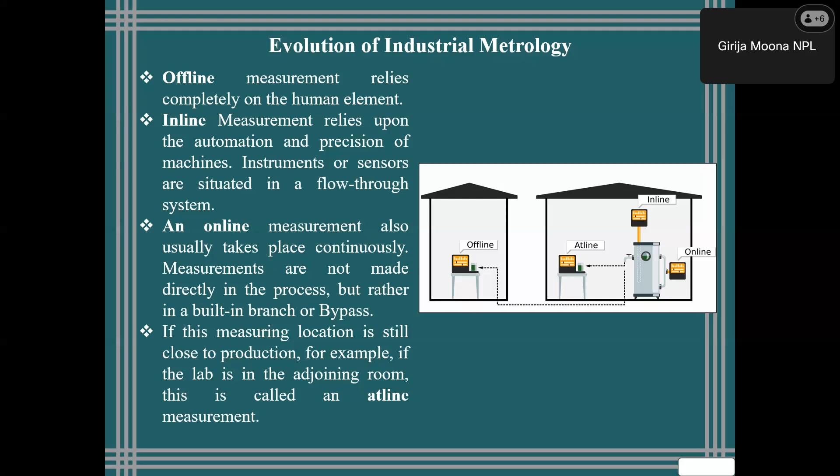Then comes online measurement. Online measurement also takes place continuously, but not directly in the process. Probably we provide a small bypass branch because of the limitation of installing the measurement facilities in the production line itself. Then comes at-line measurement, which is somewhere between offline and online. At-line means it will not be in the production line, not in the bypass line, but somewhere closer. So it involves less time waste.

So what were the milestones in manufacturing metrology? This is not all about metrology in general - since I'm a dimensional metrologist, I'll be talking about the aspect of dimensional metrology. So what were the milestones in manufacturing metrology earlier? We had calipers, universal measuring microscopes, profile projectors, comparators, form testers, incremental length measuring devices, coordinate measuring machines, optical metrology, and laser interferometer.

But now, if we talk about modern metrology, many of those earlier devices have become obsolete. If we talk about Industry 4.0, now we prefer using fringe projections, chromatic white light sensors, and white light interferometry. White light interferometry is a beautiful metrology technique - you can measure in fractions of nanometers. We have a white light interferometry based optical profiler in our lab, so it can measure in the sub-nanometers. It can measure surface roughness, step height, and grating.

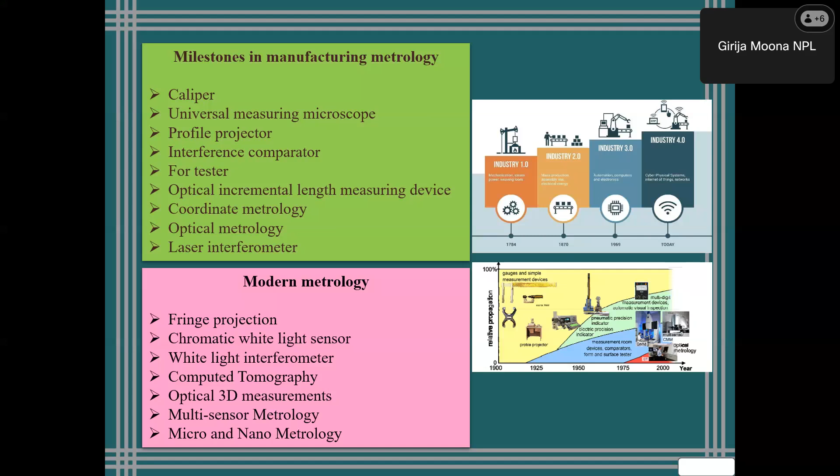It is a completely non-contact optical method to make measurements in the sub-nanometer range. Then comes computed tomography, a beautiful technology, also non-contact. It is known as X-ray computed tomography - you have an X-ray setup, you keep the component in front of it, and behind it there is a screen. The X-ray falls on the component and gives you the whole inside-outside drawing on the screen, which you can analyze very beautifully. Then there's optical 3D measurement, multi-sensor metrology known as Metrology 4.0, very closely supporting Industry 4.0, and micro and nano metrology.

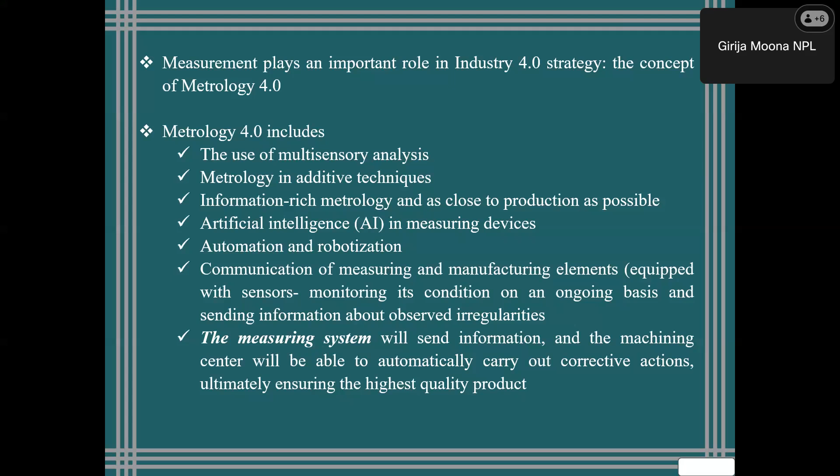Measurement plays an important role in the Industry 4.0 strategy. As we have Industry 4.0, similarly we have Metrology 4.0, which includes the use of multisensory elements, additive metrology. Metrology 4.0 and Industry 4.0 are synonyms of each other, and Industry 4.0 is very close to smart manufacturing. It involves information-rich metrology, artificial intelligence, automation and robotics, and communication between measuring and manufacturing elements - the measuring systems send information so that processes can be optimized and controlled in a better way.

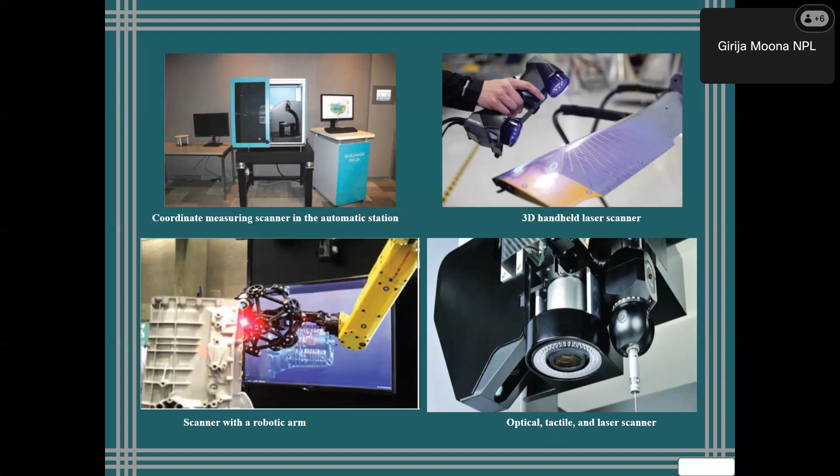The robotic arm is of much use when we talk about complex products, along with optical, tactile, and laser scanners. Then we have optical 3D scanning solutions, and inline measurement solutions.

For example, turbine blades. If you want to measure certain parameters in the turbine blade profile, it is always easier to carry the portable coordinate arm CMM to the site and make the measurements. And then there are fringe projection systems for topography.

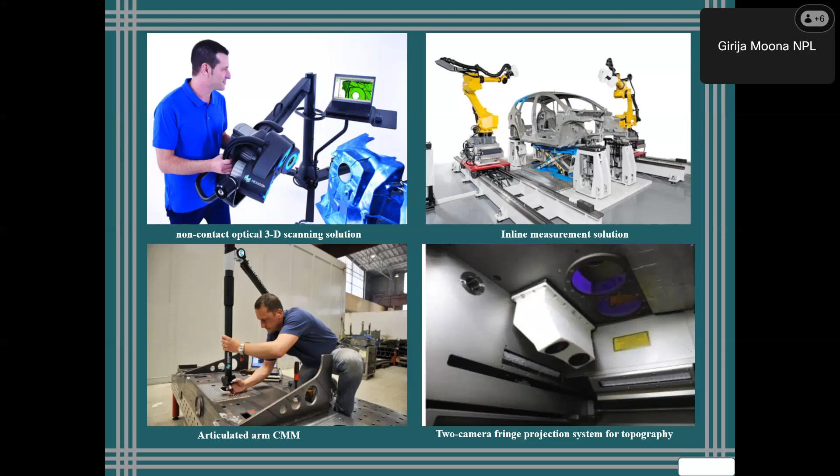So how does modern metrology enable smart manufacturing? It is an important aspect of today's manufacturing infrastructure, a crucial foundation for scientific evaluation, environment, climate, and simple information sharing. It is an activity which is not limited to specialized institutes or calibration labs. So modern metrology is omnipresent.

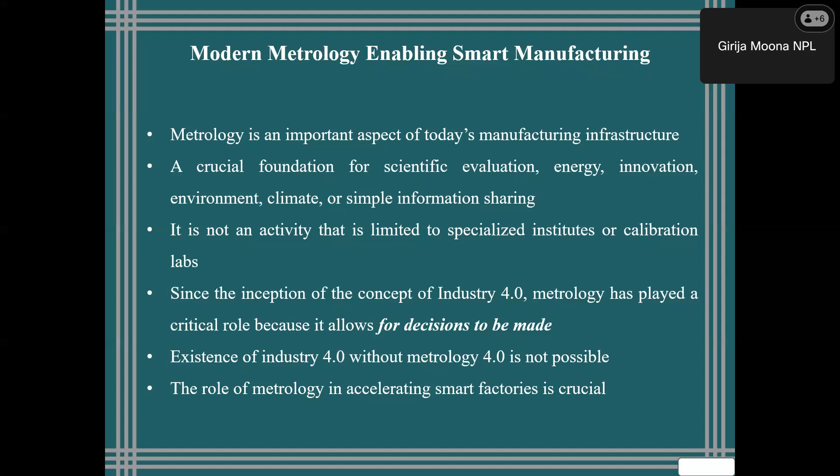The concept of Industry 4.0 involves a very important role of metrology because it allows decisions to be made. So data collection, data analysis, and decision making, this chain is a very strong component of Industry 4.0. Industry 4.0 is not possible without Metrology 4.0. So the role of metrology in accelerating smart factories is very crucial.

As I told you, until there is awareness of what is to be measured and how critically it is to be measured, the industries would not stay competitive, and the production wouldn't be efficient. So it is very important to decide what is to be measured, what technique is to be used, how much to be invested, and how much time is to be given to this particular kind of measurement.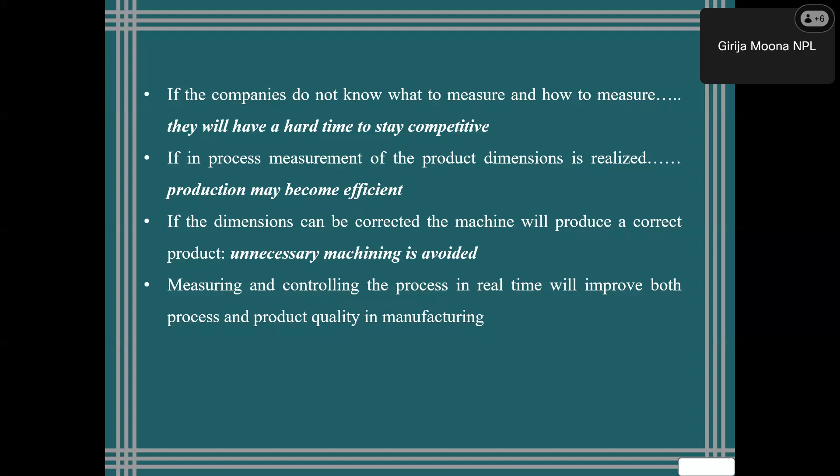Also, in smart industries, if there are vibration and temperature differences, they can be sensed using smart sensors, and you can have a sense that there is something wrong with the machine. So smart sensors can give an indication if some part is loose in the machine, which can affect the machining process, causing unnecessary vibrations.

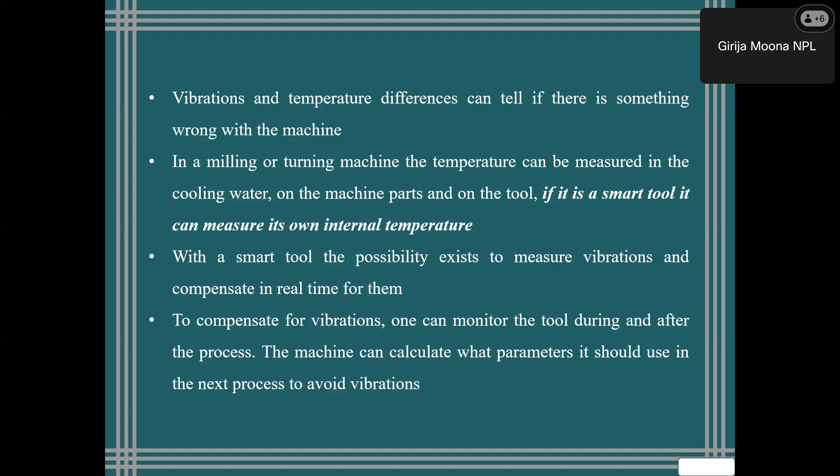They can also give an indication that the machine is having this much of a problem, and it can cause problems in the machining process. Also, to compensate for the vibration, the operator can monitor the tool or any part of the machine causing vibration, and can calculate the process parameters which can be controlled to avoid excess vibration.

The sensors may be good enough, but as I told you, only getting the data is not enough. Connecting the data and securing it is very, very important for smart manufacturing.

There is an example where, in a smart factory, a GPS was attached to the forklift, which is used to pick up stuff and place it somewhere else. Every time the forklift places something, it sends its footprint to the cloud. So a person can keep track of where the forklift is moving, where it is picking things up from, and where it is taking them. Also, if there are any obstacles in the path of the forklift, those can be identified and fixed.

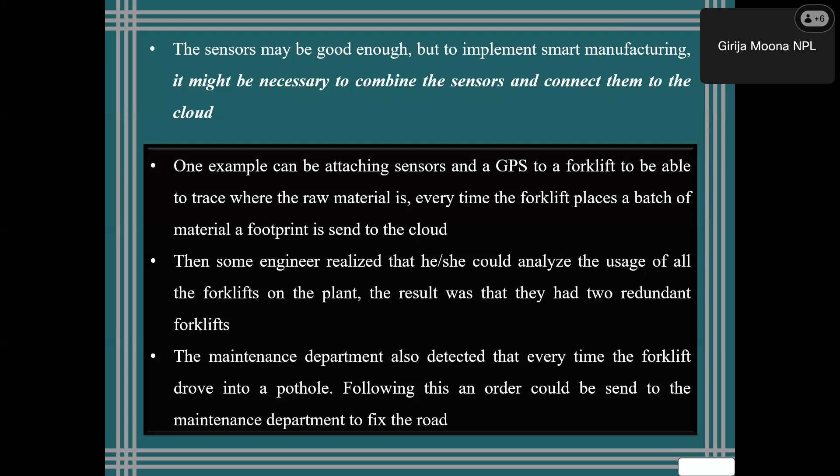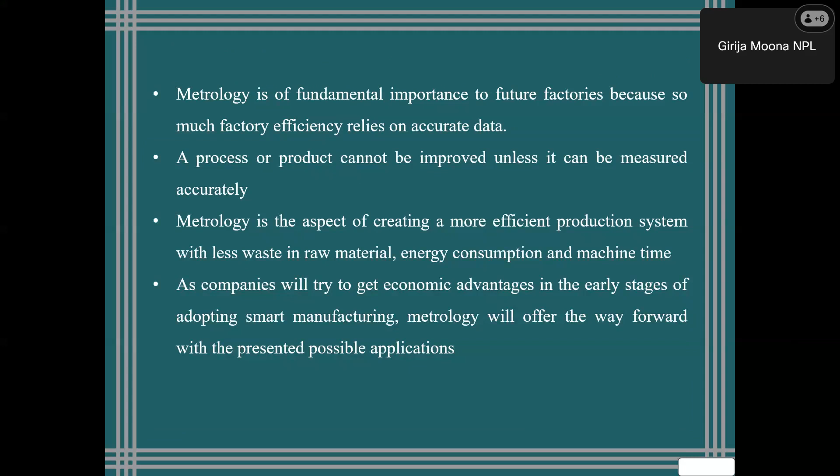So metrology is of fundamental importance to future factories, and it can always contribute to manufacturing quality products, efficient production systems, less wastage, and economical advantage in the early stage of adopting smart manufacturing. So the objective is to make the transition, to make operators' work and managers' decisions easier. It is connected to digital manufacturing by providing actionable information to refine manufacturing processes.

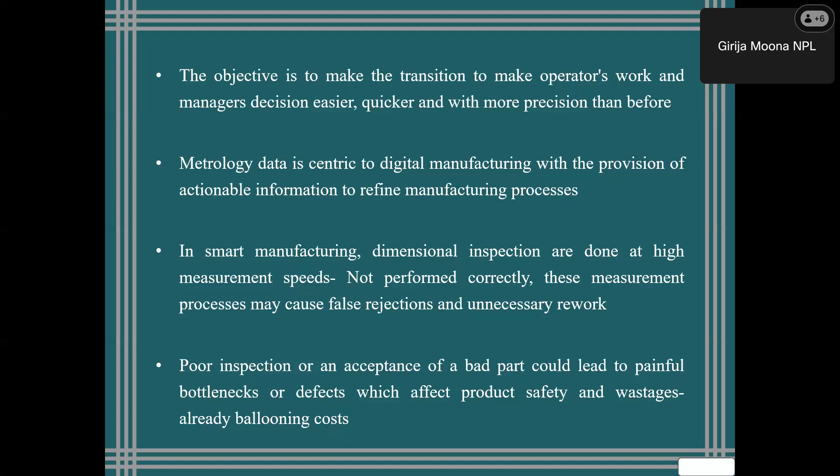In smart manufacturing, dimensional inspections are very important, and they are done at measurement speed so the process can be controlled and optimized. If there is a poor inspection and a bad part is formed, which can cause a bottleneck, that can also be identified and completely eliminated. So for quality control of miniaturized assemblies, the measurement technology must offer high resolution and accuracy, with reliable measurement.

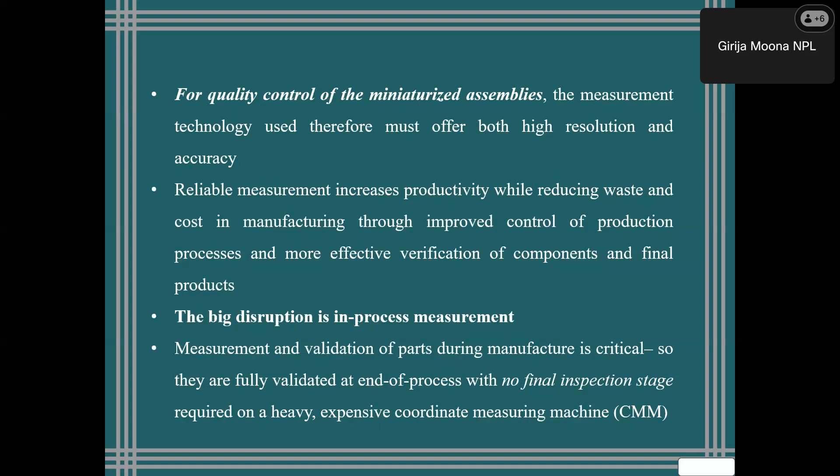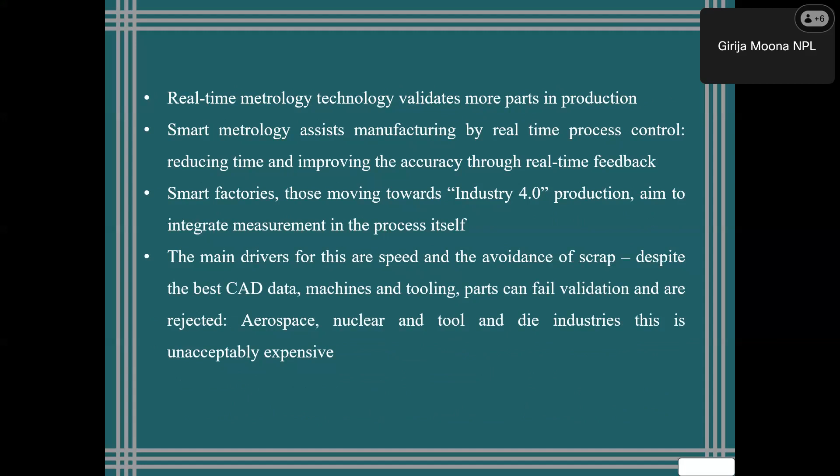The biggest disruption is in process measurement. We have to optimize the production process along with the measurement very smartly. In smart manufacturing, real-time metrology validates the parts in production, and the main drivers are speed and the avoidance of scrap.

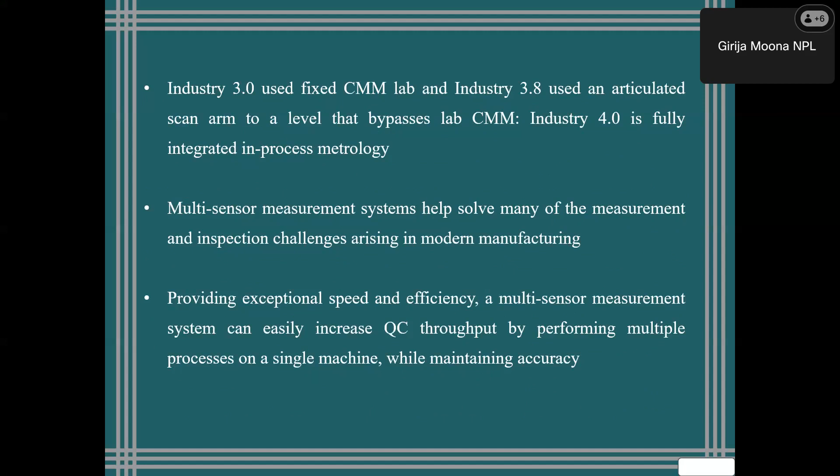Industry 3.0 used the fixed CMM, industry 3.8 used the articulated CMM, and industry 4.0 is using the CMM integrated in the production line itself. There are multi-sensor measurement systems to take real-time information, providing exceptional speed and efficiency for quality control.

There are certain technologies being used in smart manufacturing: laser line scanning, which can be done in the production line itself; structured light using LED projectors; and imaging technology like thermal imaging, X-ray, and computer tomography, along with robots.

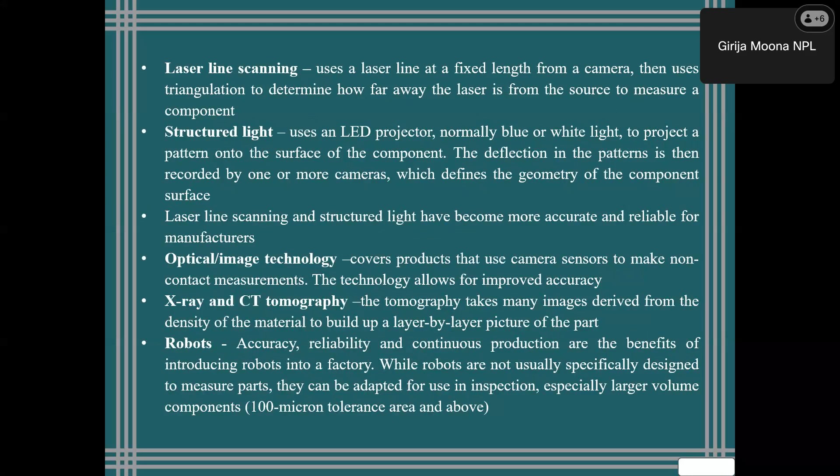The conclusion is that the use of metrology will be essential from the starting point to the end of manufacturing. Industry 4.0 and metrology 4.0 shall grow hand in hand. Precision metrology and production data are extremely important to control the entire manufacturing flow, starting from design to production to supply.

Integrating metrology in the manufacturing process will further link the metrologist to the user community. It needs a very strong bond. Users need to understand the importance of metrology, and metrologists need to make users aware of the importance of metrology in every aspect of life.

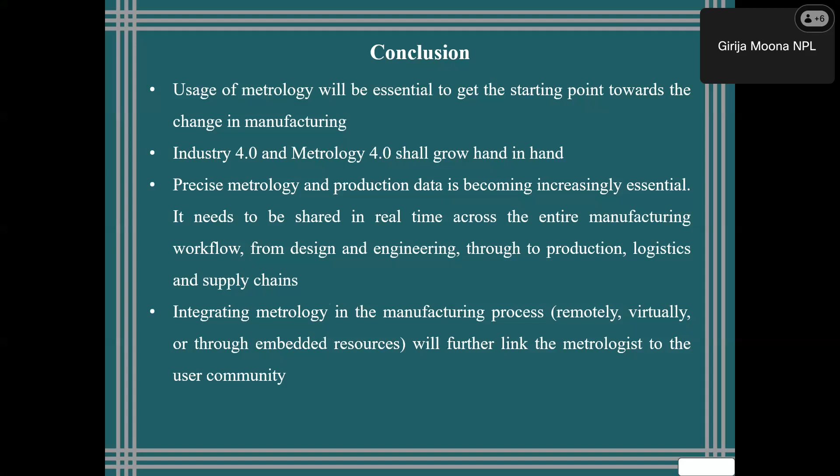Also, without data collection, industry 4.0 wouldn't be effective. Variation is detected early enough. If there are certain disturbances, we can sense them, and in smart manufacturing a corrective action can be taken to compensate.

Metrology systems collaborate with real-time quality information without compromising security. Real-time data collection is important, but securing that data and giving accessibility to the right person is very important.